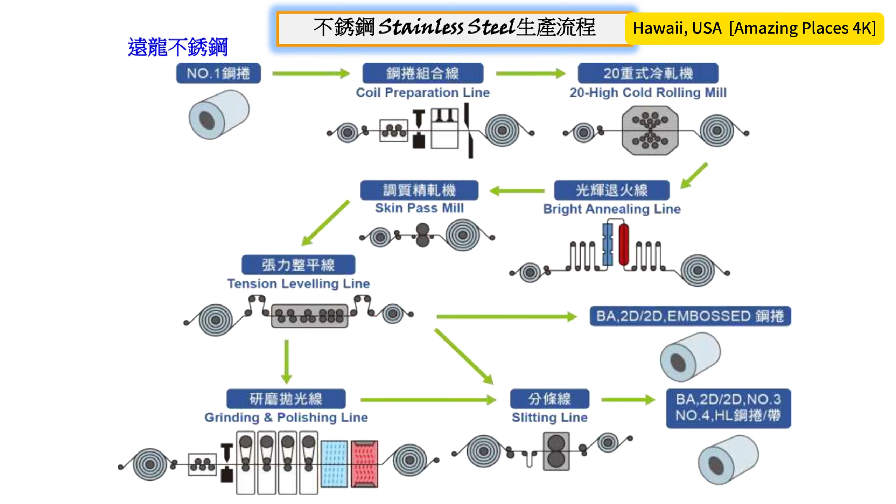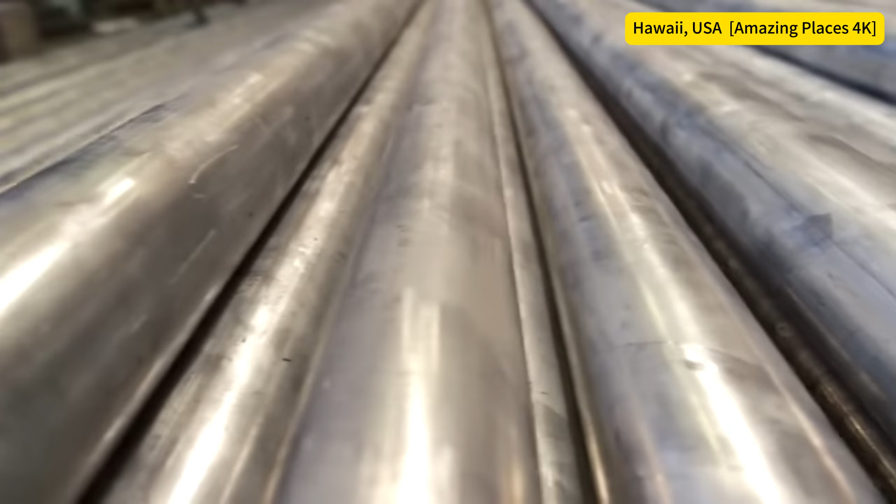How is stainless steel made? How are stainless bar and billet made? Stainless steel is one of the most versatile and widely used materials in the modern world, playing a crucial role in industries ranging from construction and automotive to medical devices and kitchenware. Its unique properties, including resistance to corrosion, high strength, and a sleek appearance, make it indispensable in countless applications. But how is this wonder material made?

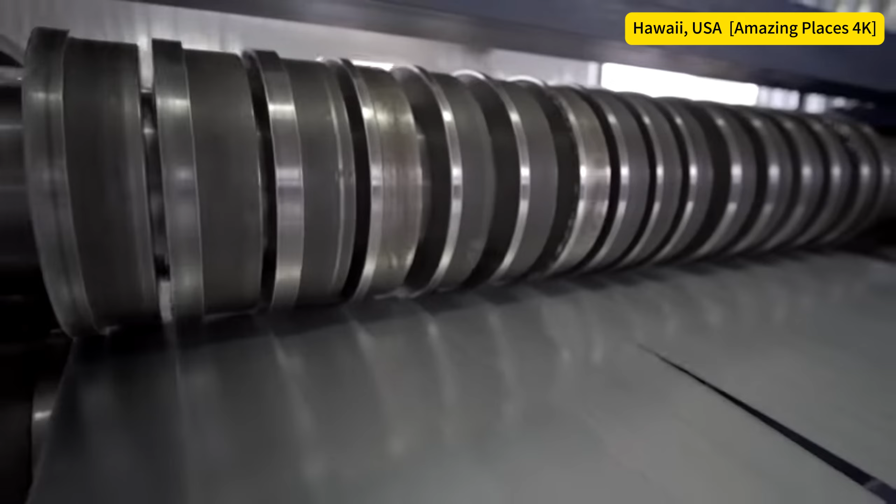The process of manufacturing stainless steel is a complex and fascinating journey that involves multiple stages, from the selection of raw materials to the final finishing touches. In this video, we'll take you through each step of the process, shedding light on the science and engineering that goes into creating this remarkable alloy.

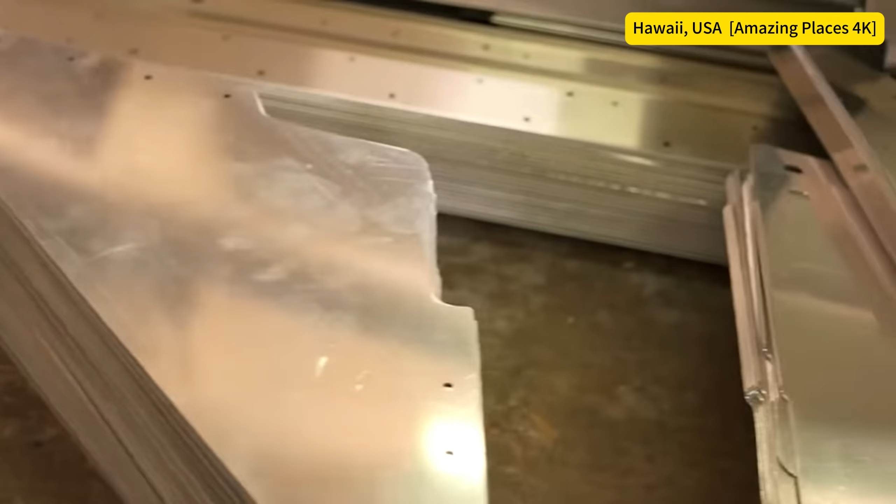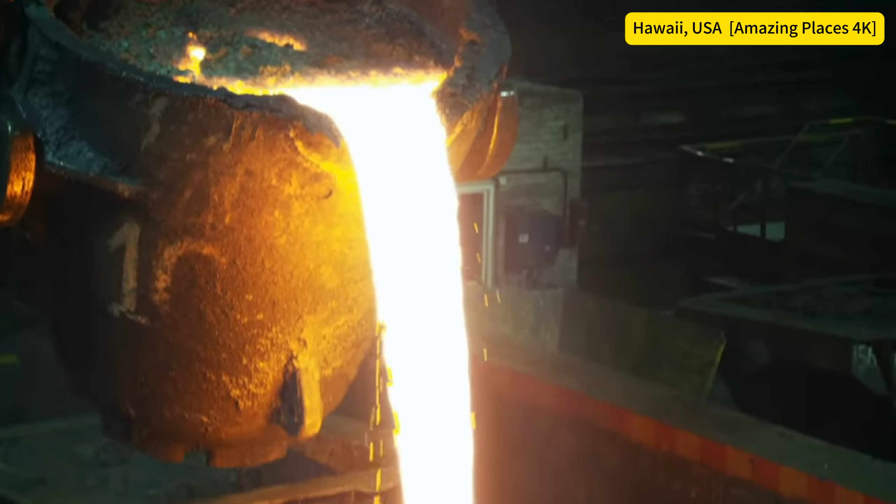The story of stainless steel begins with the selection of the right raw materials. The primary component of stainless steel is iron, which is extracted from iron ore found in the Earth's crust. Iron ore is rich in iron oxides and must be refined to extract pure iron. This is done in a blast furnace, where the iron ore is heated to extremely high temperatures, around 1,700 degrees Celsius, along with coke, a form of carbon, and limestone.

The intense heat causes the iron ore to melt, and the carbon from the coke reacts with the oxygen in the iron ore to form carbon dioxide, leaving behind molten iron. This molten iron, also known as pig iron, is the starting point for making stainless steel. However, stainless steel is much more than just iron.

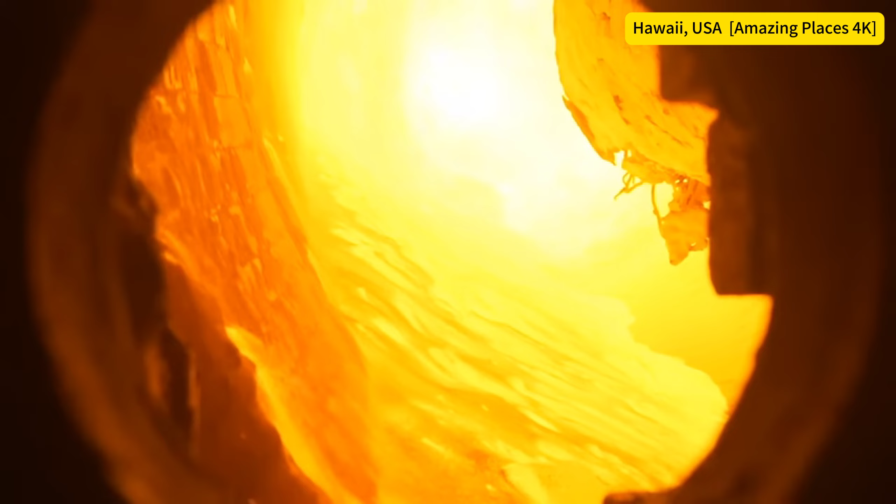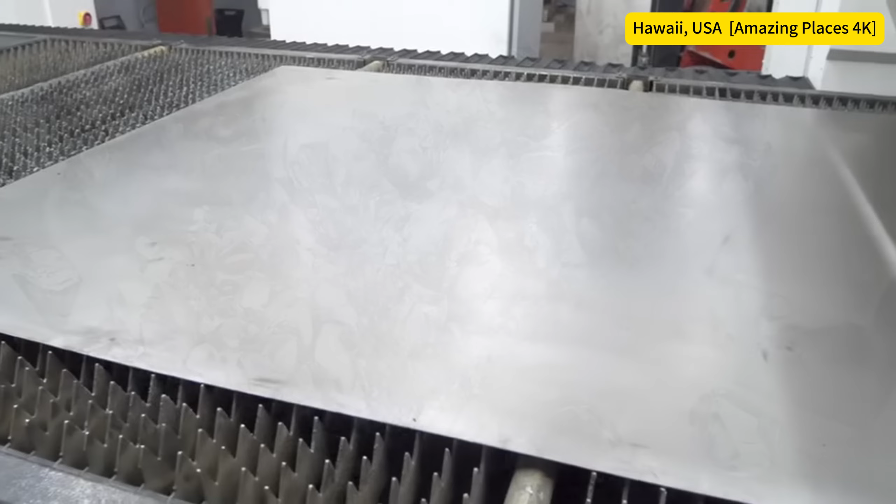Its defining characteristic is its resistance to rust and corrosion, which is achieved by adding specific alloying elements, most notably chromium. Chromium is essential because it reacts with oxygen to form a thin, invisible layer of chromium oxide on the surface of the steel. This oxide layer is what gives stainless steel its stainless property, as it prevents further oxidation and corrosion of the metal beneath.

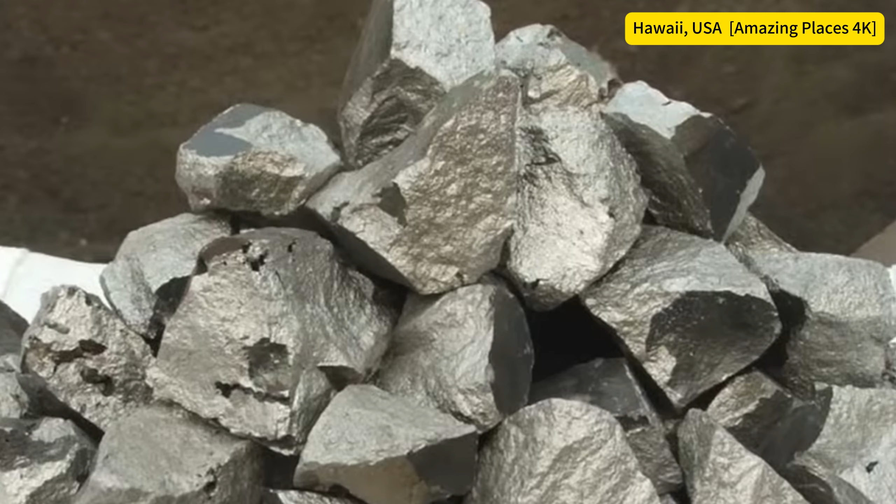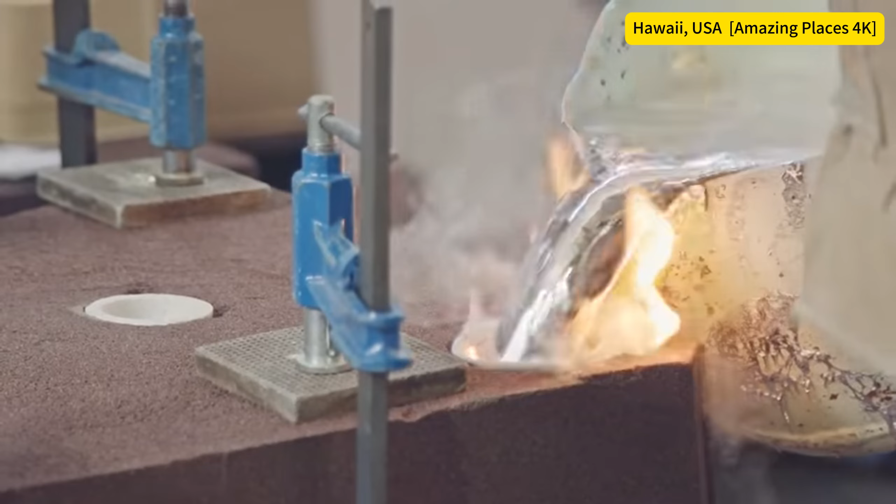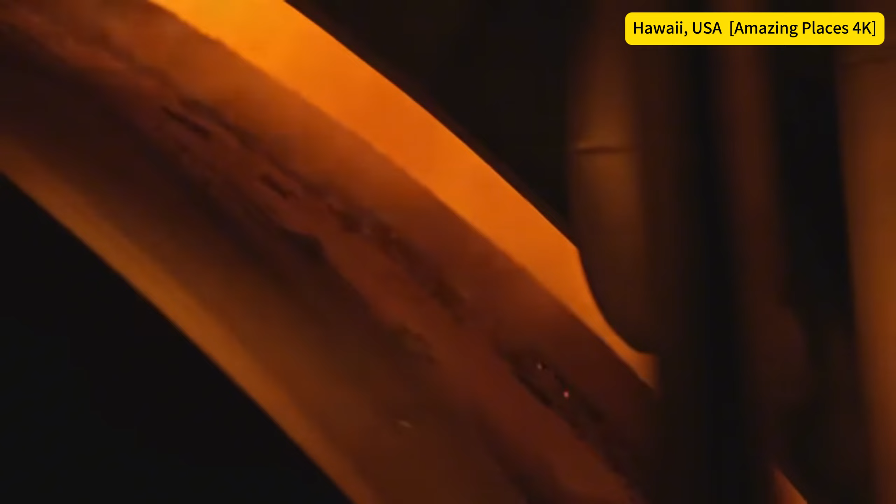To achieve this, chromium is added to the molten iron in the form of ferrochrome, an alloy of iron and chromium. Typically, stainless steel contains at least 10.5% chromium by weight, although the exact percentage can vary depending on the grade of stainless steel being produced. The addition of chromium is just the beginning. Depending on the desired properties of the final product, other elements such as nickel, molybdenum, and manganese may also be added to the molten steel.

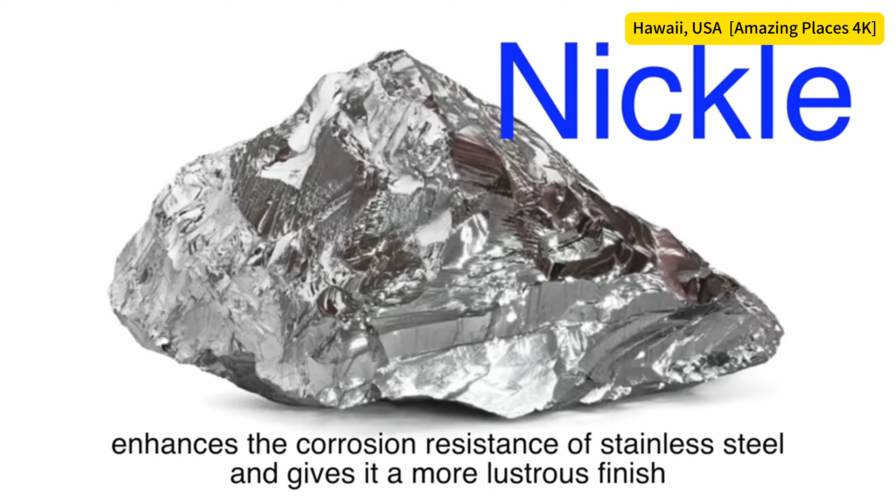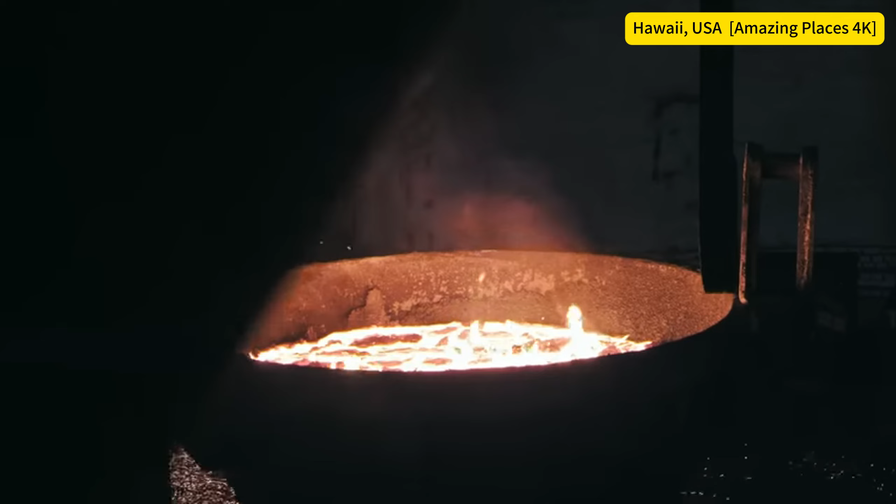Nickel, for example, enhances the corrosion resistance of stainless steel and gives it a more lustrous finish. Molybdenum increases the steel's resistance to pitting and crevice corrosion, which is especially important in environments with high chloride content, such as marine applications. Manganese improves the steel's strength and hardness. These alloying elements are carefully measured and added to the molten steel in precise quantities, as even small variations can significantly impact the properties of the final product.

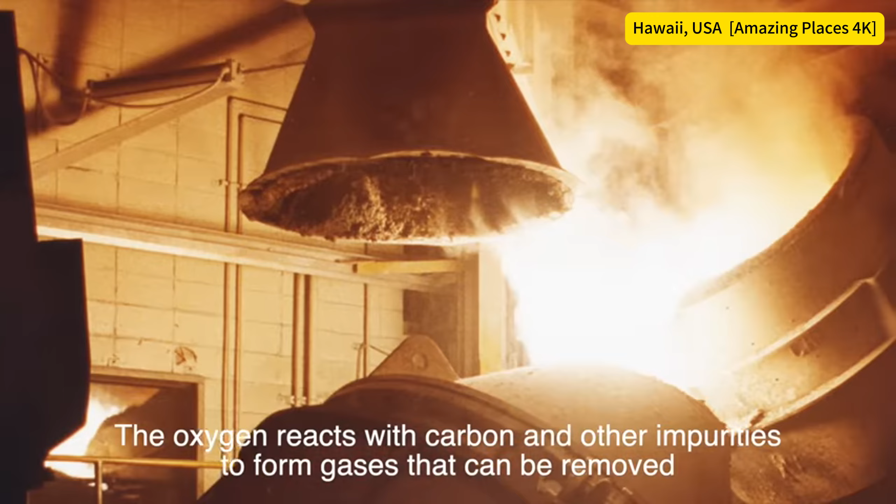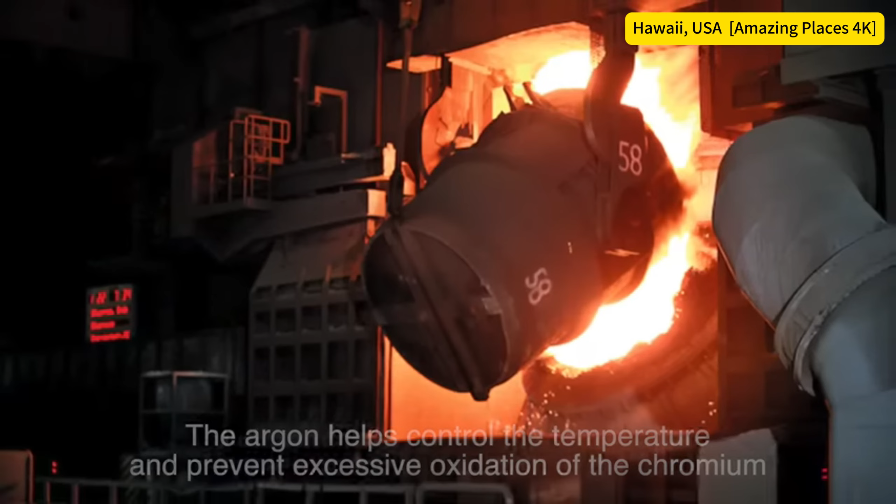Once the alloying elements have been added and thoroughly mixed with the molten iron, the next step is to remove any impurities that might have been introduced during the process. This is done through a process known as argon-oxygen decarburization, AOD. In AOD, a mixture of argon and oxygen is injected into the molten steel. The oxygen reacts with carbon and other impurities to form gases that can be removed, while the argon helps control the temperature and prevent excessive oxidation of the chromium. The result is a purer form of stainless steel, with a carefully controlled composition that ensures the desired properties are achieved.

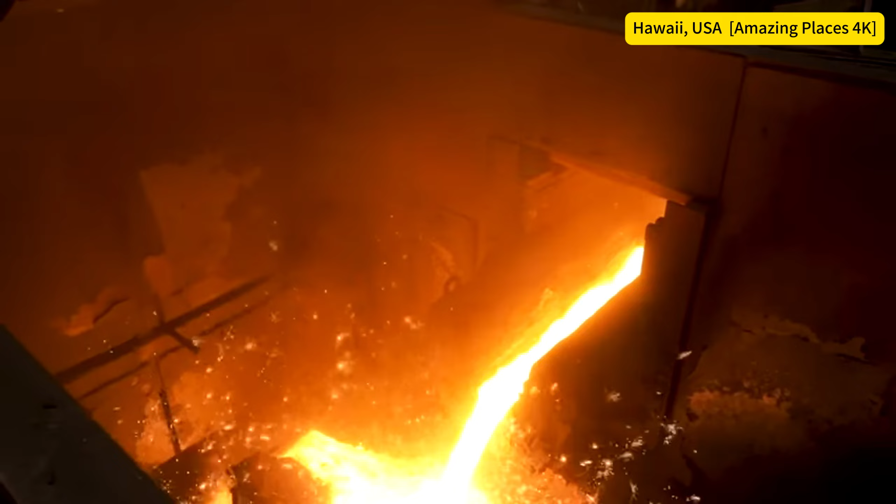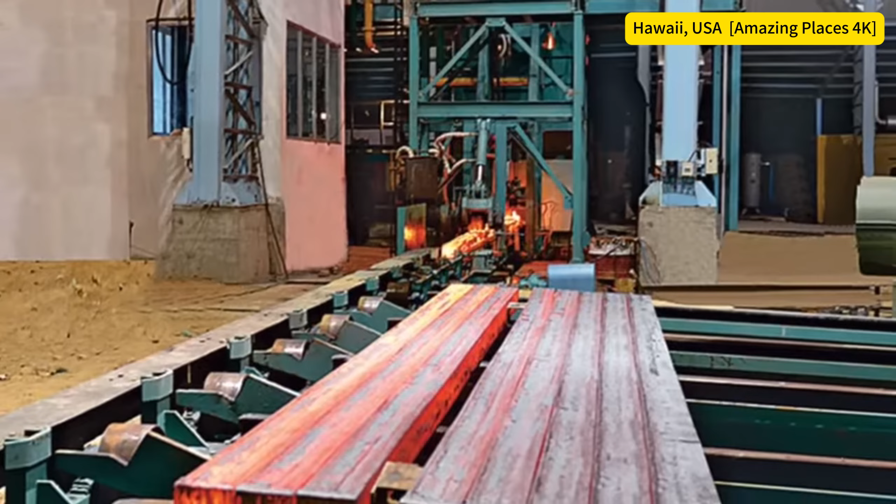After the AOD process, the molten stainless steel is ready to be cast into solid form. This is typically done using a method called continuous casting, where the molten steel is poured into a water-cooled mold. As the steel cools, it solidifies into a long continuous slab or billet, which can then be cut into smaller sections as needed. Continuous casting is preferred because it allows for the production of large quantities of stainless steel with consistent quality. The slabs or billets are then allowed to cool further before being sent to the next stage of the manufacturing process.

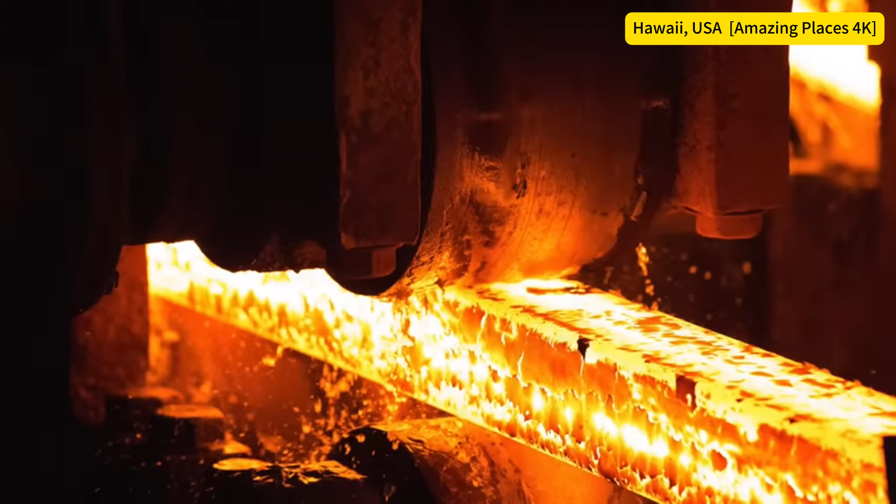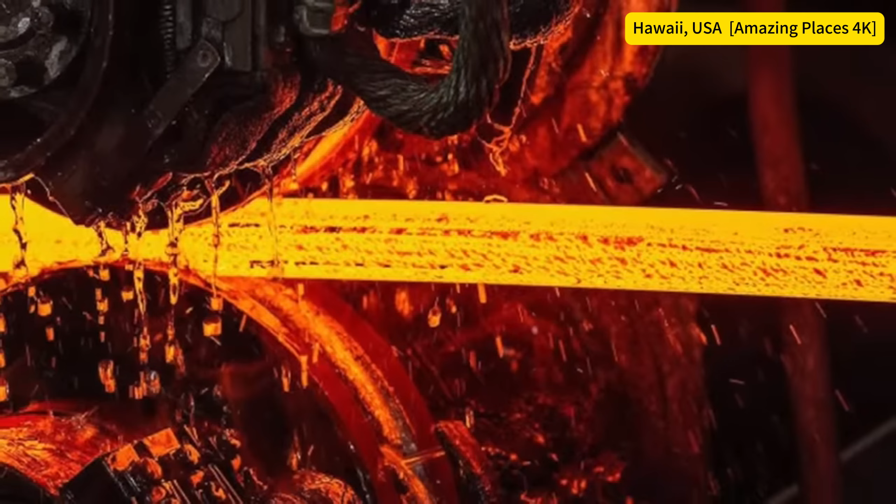The next step in the production of stainless steel is hot rolling. The cooled slabs or billets are reheated to a temperature of around 1,200 degrees Celsius and pass through a series of rollers. These rollers apply pressure to the steel, gradually reducing its thickness and shaping it into the desired form. Hot rolling not only shapes the steel, but also improves its mechanical properties by refining the grain structure. The steel can be rolled into various forms, such as sheets, plates, bars, or wires, depending on the intended application. After hot rolling, the steel is allowed to cool down again before moving on to further processing.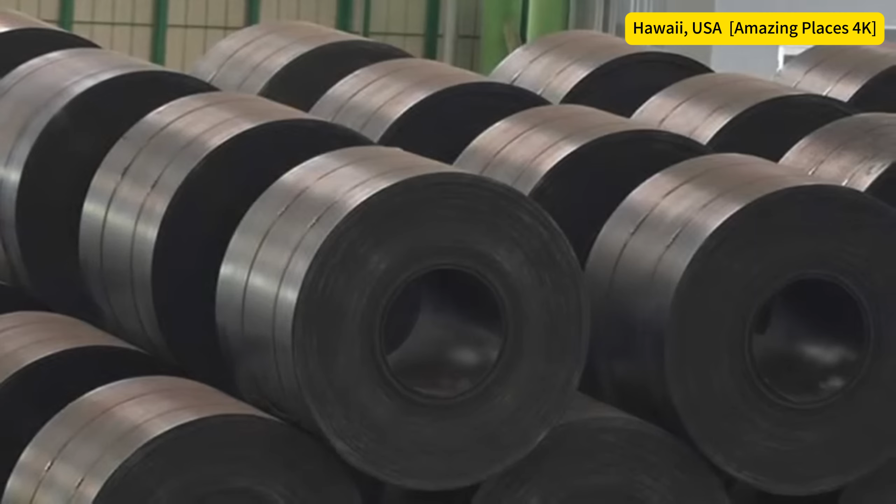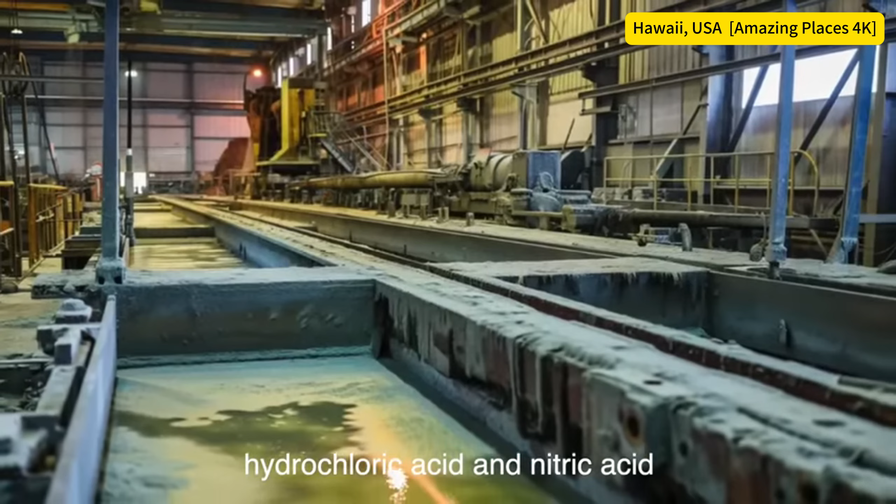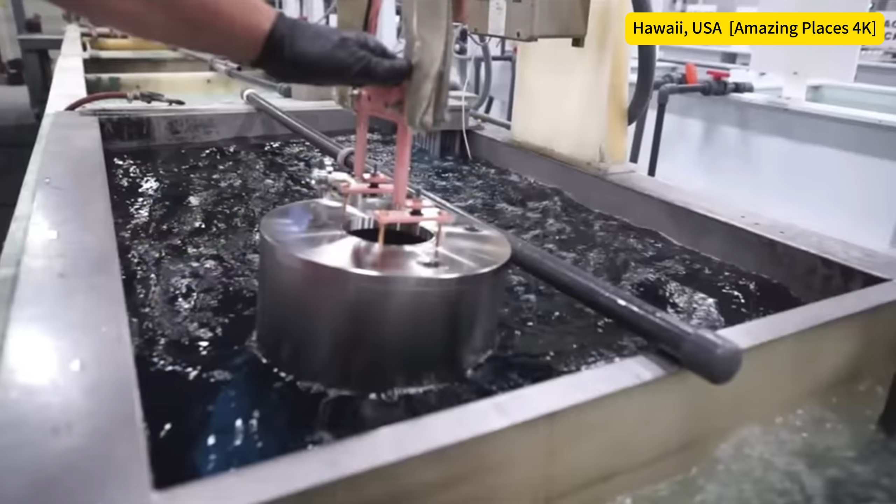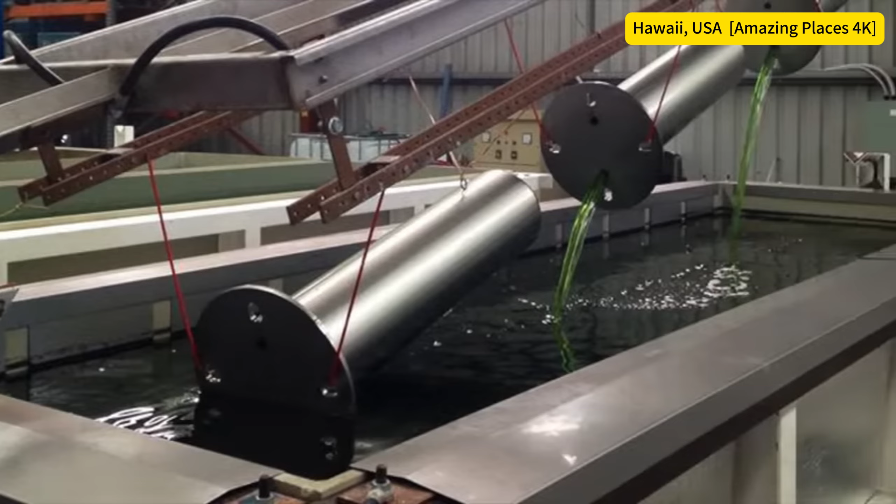At this point, the stainless steel still has a rough, oxidized surface that needs to be cleaned and finished. This is where the process of pickling comes in. Pickling involves immersing the steel in an acid bath, usually a mixture of hydrochloric acid and nitric acid. The acid removes the oxide scale and any other surface impurities, leaving behind a clean, smooth surface. In some cases, additional treatments such as electropolishing may be used to achieve an even higher level of surface finish, particularly for applications where aesthetics are important, such as in kitchenware or architectural components.

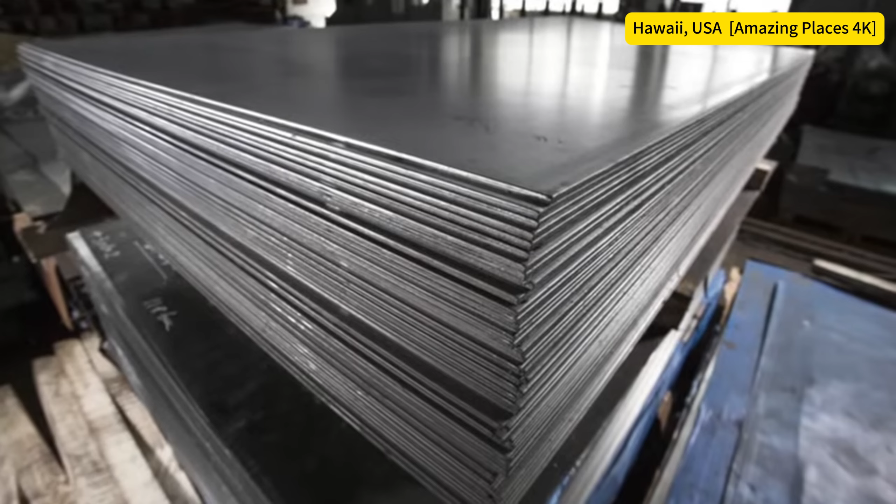Once the stainless steel has been pickled and cleaned, it is ready for the final finishing processes. These processes vary depending on the intended use of the steel and can include cold rolling, annealing, and surface finishing. Cold rolling involves passing the steel through rollers at room temperature to achieve a precise thickness and improve its surface finish.

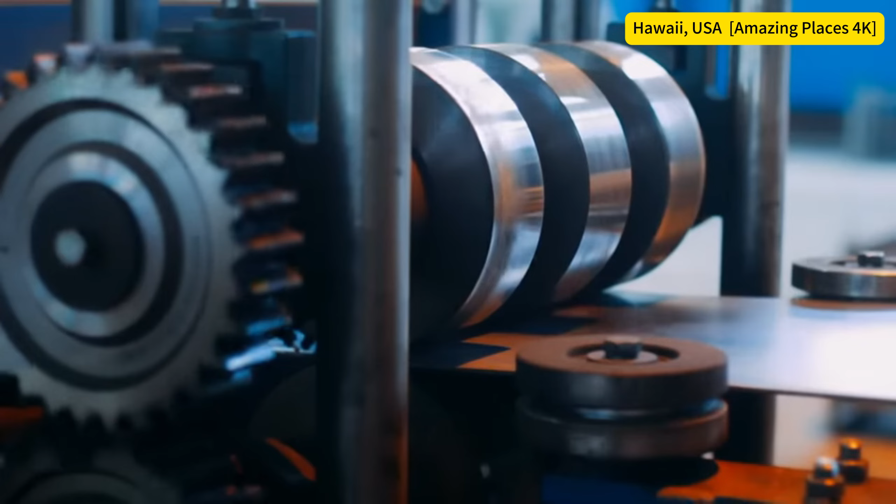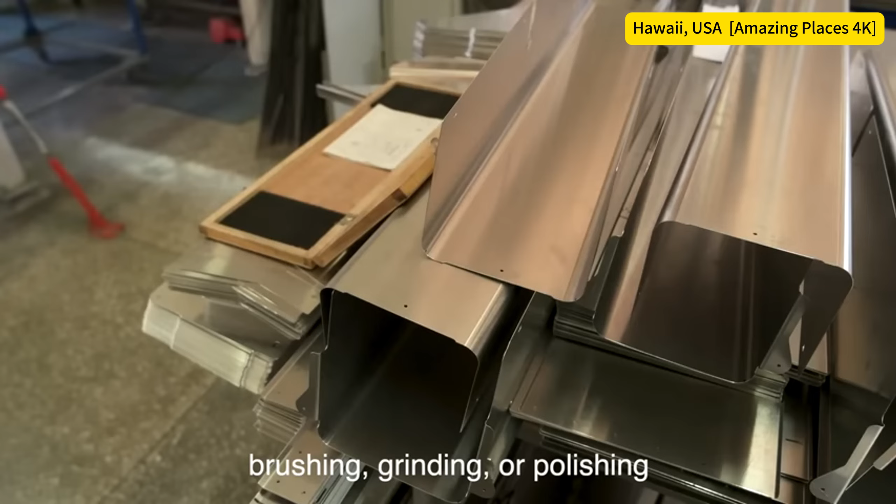Annealing is a heat treatment process that relieves internal stresses in the steel, making it easier to work with and enhancing its ductility. Surface finishing can involve a variety of techniques, such as brushing, grinding, or polishing, to achieve the desired texture and appearance. The final product may have a mirror-like shine, a matte finish, or a textured surface, depending on the customer's specifications.

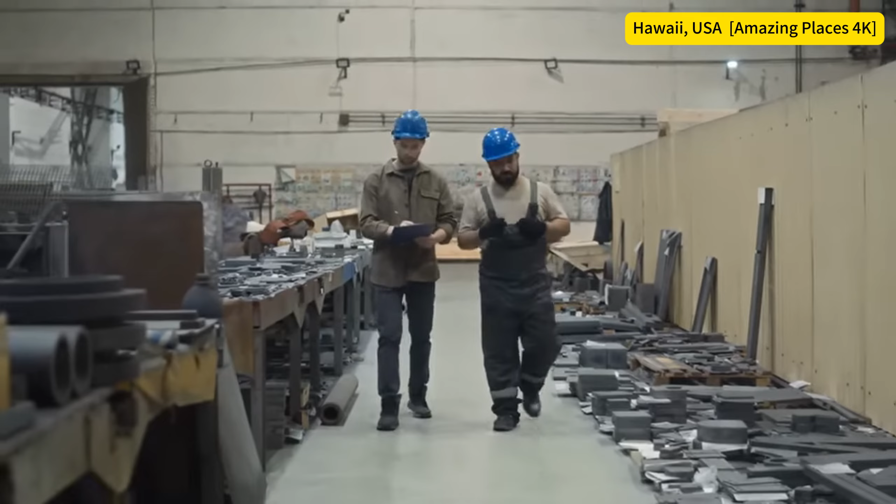The production of stainless steel doesn't end with the final finishing. Quality control is a critical aspect of the manufacturing process, ensuring that the steel meets the required standards for strength, corrosion resistance, and other properties.

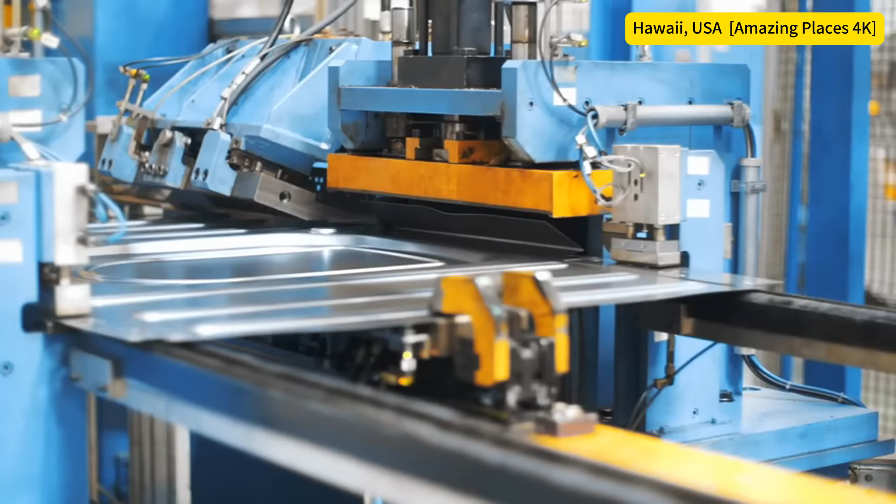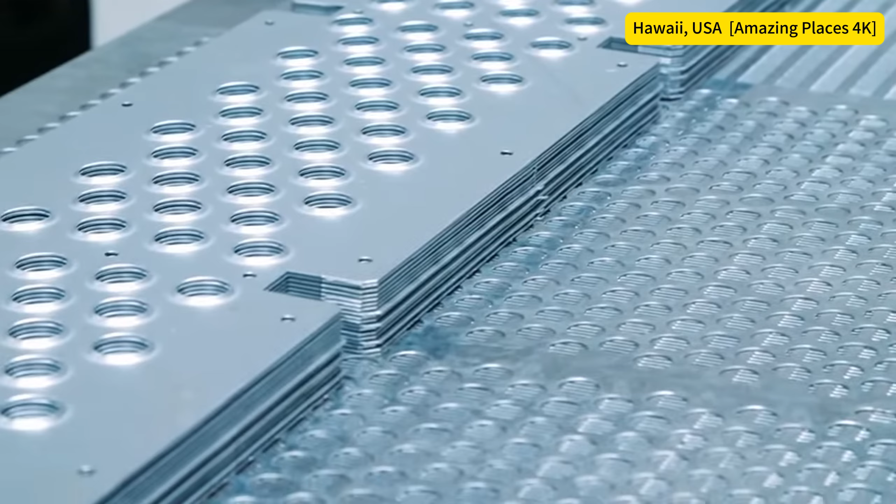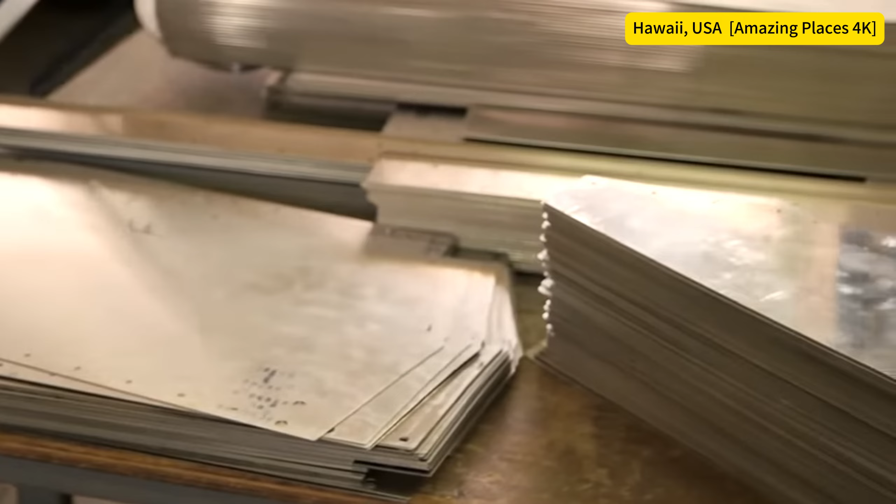Samples of the steel are taken at various stages of production and subjected to rigorous testing, including chemical analysis, mechanical testing, and microstructural examination. These tests verify that the composition and properties of the steel are within the specified limits, and that there are no defects that could compromise its performance. Only after passing these tests is the stainless steel considered ready for use.

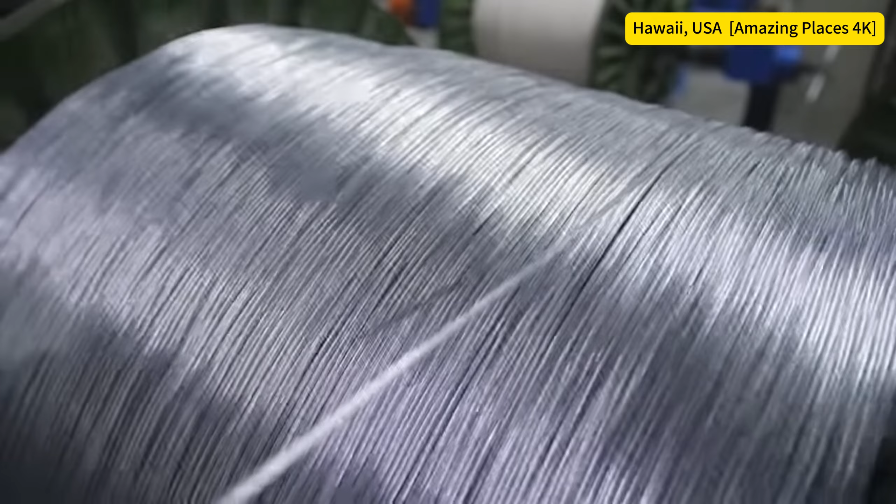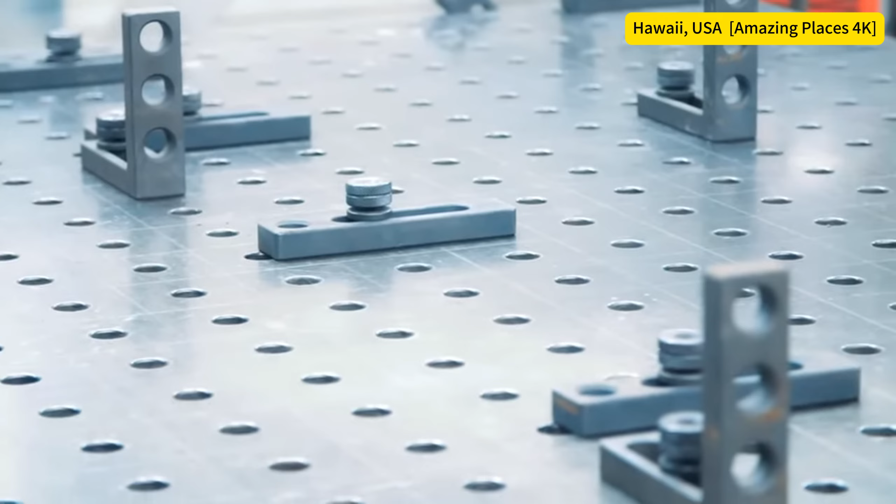Stainless steel is then ready to be shipped to manufacturers who will transform it into the products we use every day. It could become part of a kitchen appliance, a piece of medical equipment, a structural component in a building, or even a piece of jewelry. The versatility of stainless steel is one of its greatest strengths, and its journey from raw materials to finished product is a testament to the ingenuity and precision of modern metallurgy.

The production of stainless steel is a complex and highly controlled process that requires expertise in both materials science and engineering. From the selection of raw materials to the final finishing touches, each step is carefully designed to ensure that the steel possesses the properties needed for its intended use.

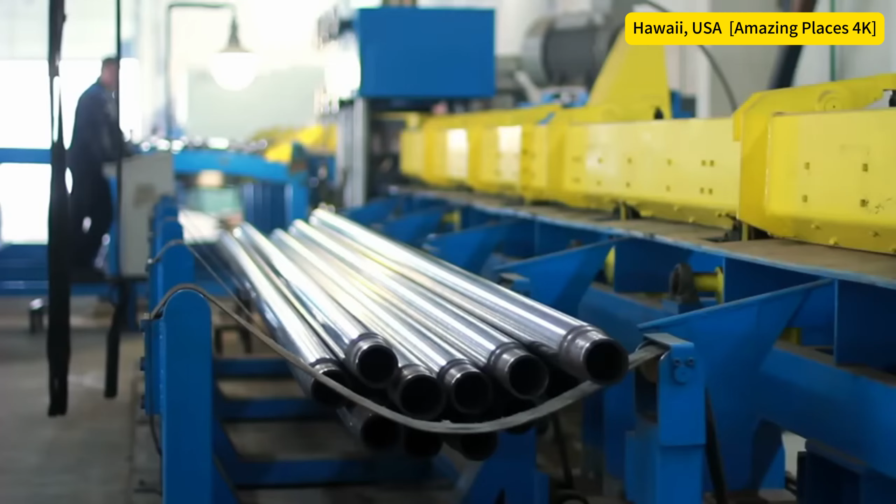Whether it's the chromium that provides corrosion resistance, the nickel that enhances durability, or the precision rolling that achieves the perfect thickness, every aspect of the process contributes to the creation of a material that is both strong and beautiful. So the next time you see a shiny piece of stainless steel, take a moment to appreciate the intricate and fascinating journey it has taken to reach you.

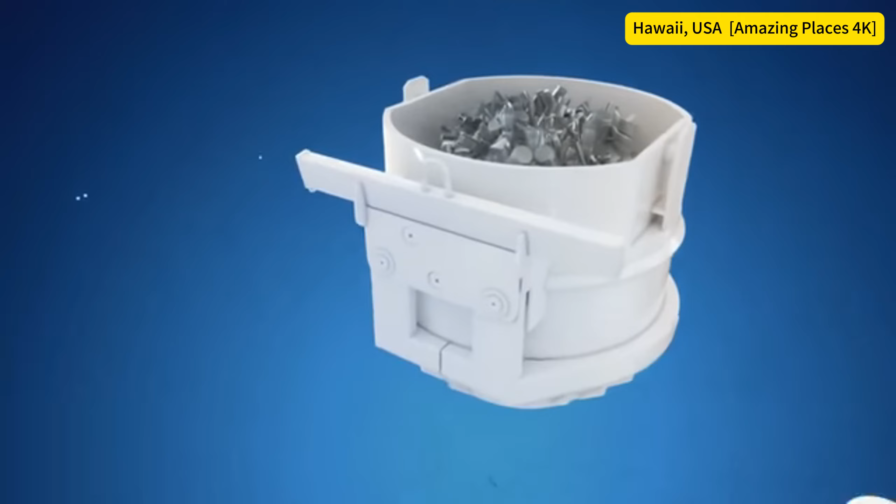At Sandvik, manufacturing is based on recycled steel and alloy materials. We buy recycled steel only from certified suppliers. The raw materials are analyzed and controlled, and any harmful ingredients are removed. The recycled steel is melted at 1600 degrees centigrade in an electric arc furnace. In the argon-oxygen decarburization vessel, carbon content is reduced to stainless steel levels.

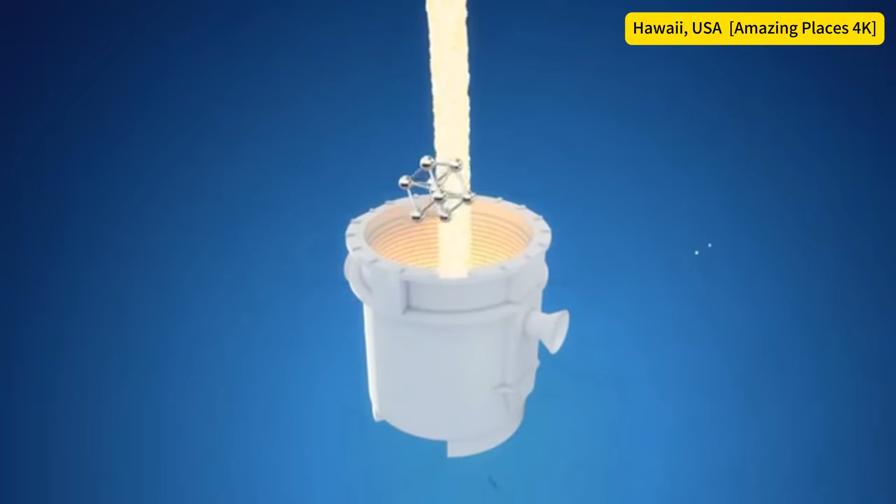Exhaust gases from the furnaces and AOD processes are filtered to cut pollution, and the dust thus extracted is further processed for metal recovery. The melt is transferred to a ladle furnace for fine-tuning of temperature and chemical composition. The chemical composition of the melt is closely monitored throughout the process, and we make continuous analyses to guarantee the correct steel grade and ensure traceability and consistency between the batches. The results are entered in a certificate that accompanies each batch through every stage of the process.

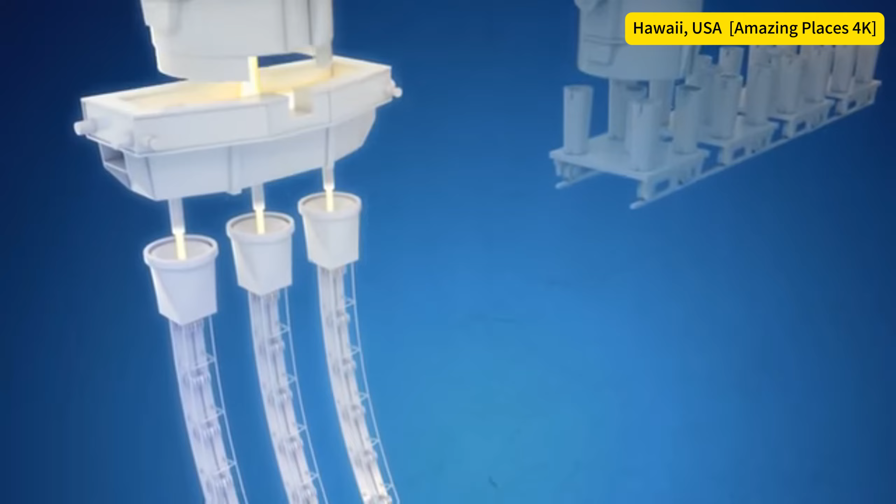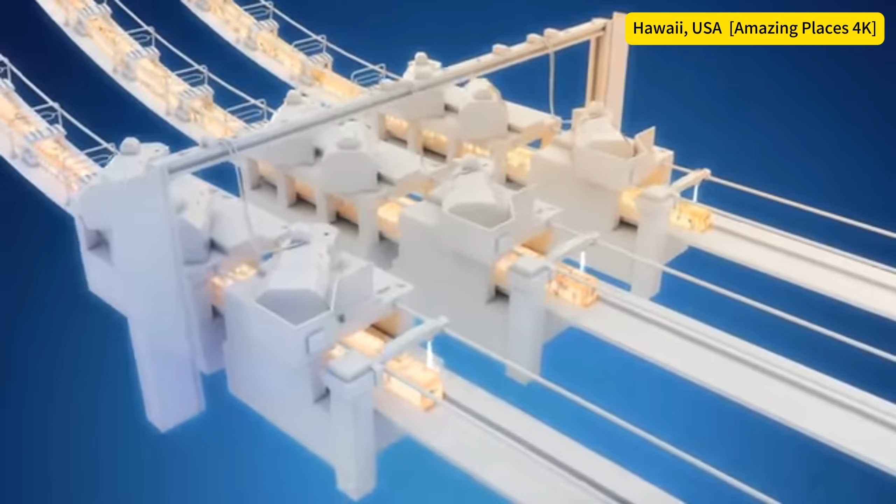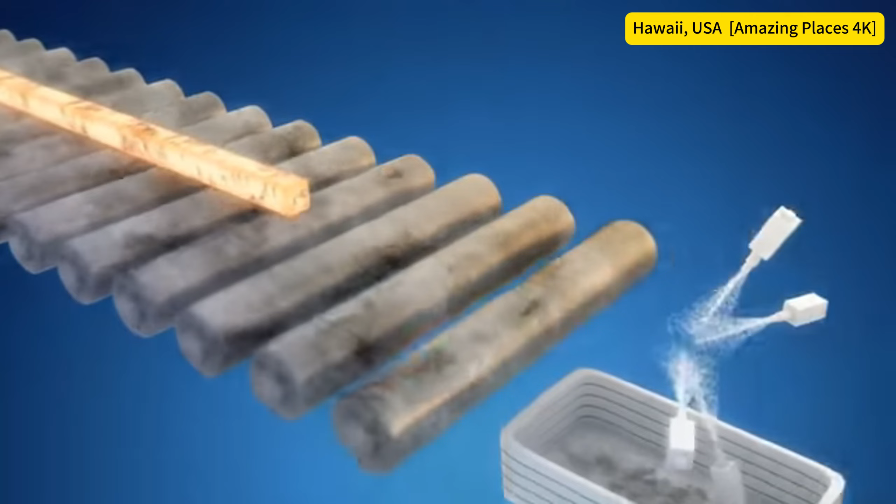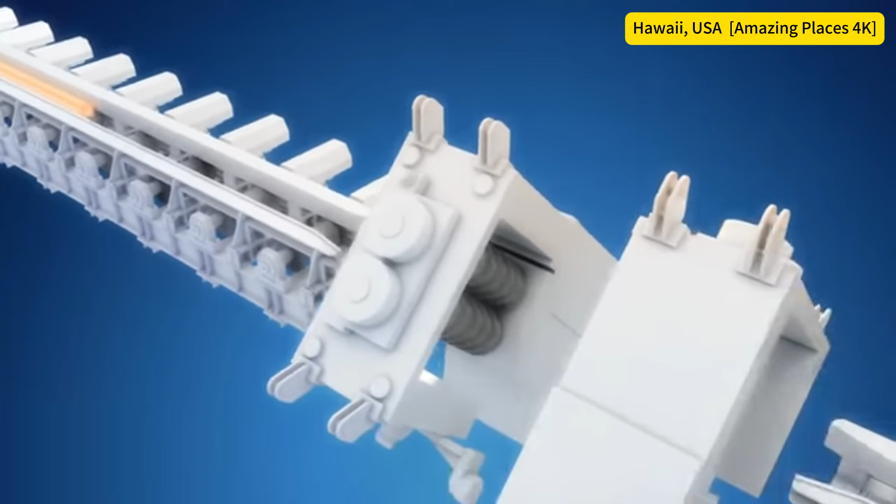The continuous cast material or ingots are pre-rolled in a blooming mill and then transported to a heating furnace to be reheated to the correct rolling temperature. The blooming mill is integrated with Sandvik's modern rolling mill to form one continuous production line. The new mill provides quick product dimension changeover, short lead times, energy savings, and excellent product quality.

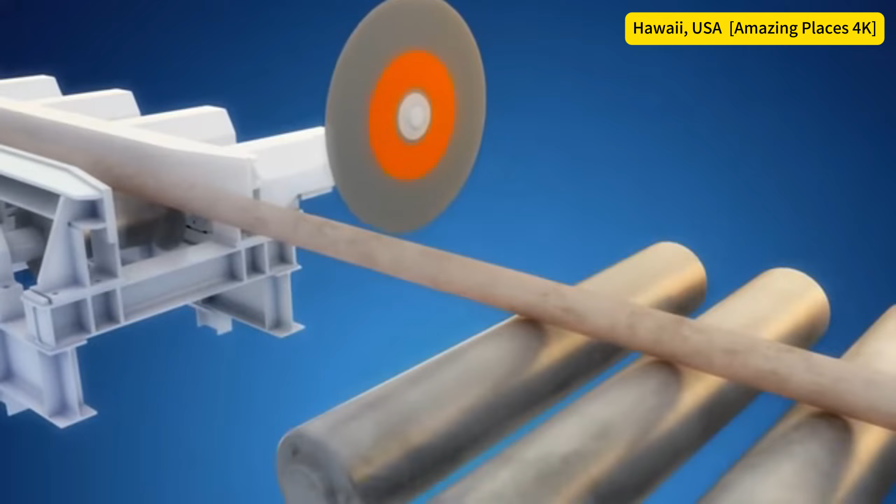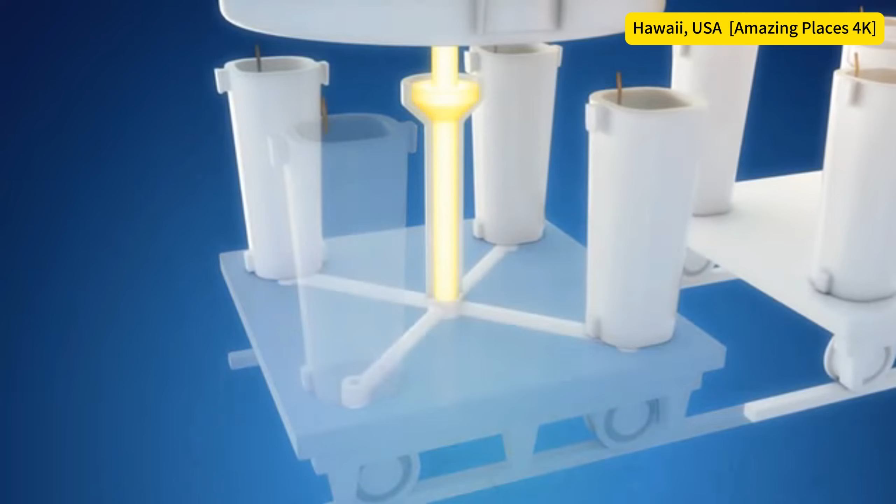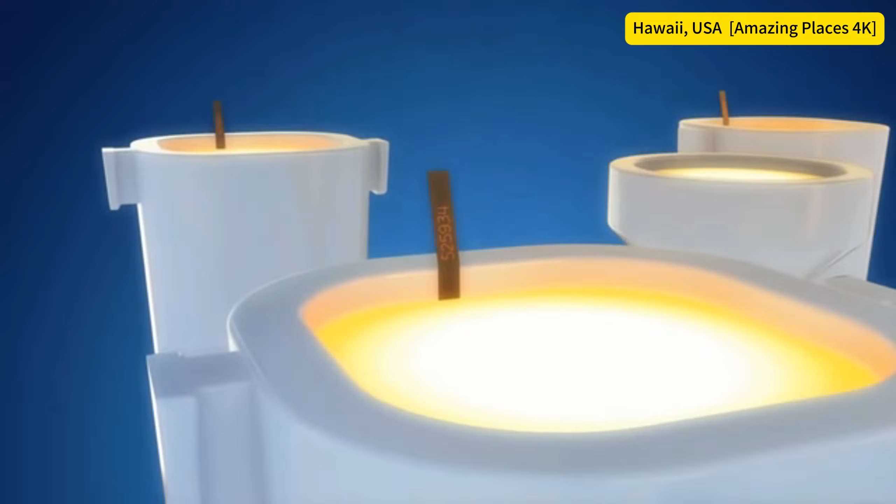Here, round and square billets and bars are rolled to a wide variety of sizes in many passes, and cut into requested lengths. To produce bars in heavier dimensions, the steel is cast into ingot molds by bottom pouring. Each ingot is marked with a heat number to ensure full traceability. The ingots are stripped from their molds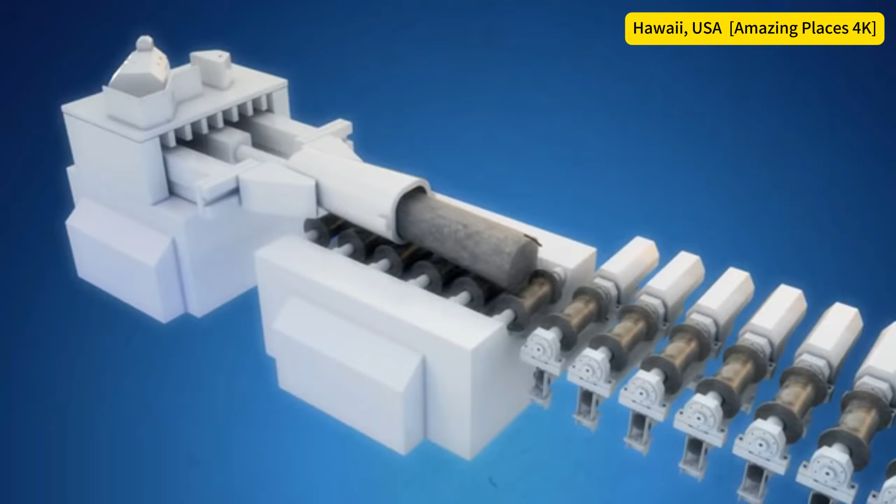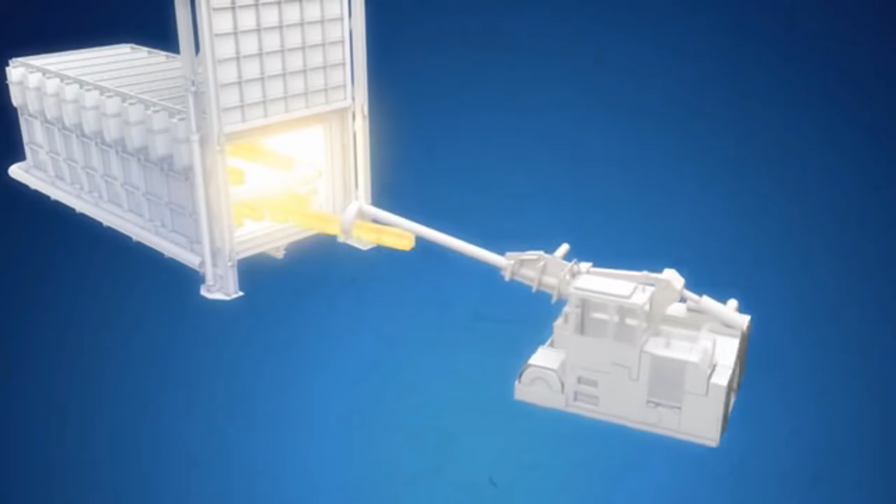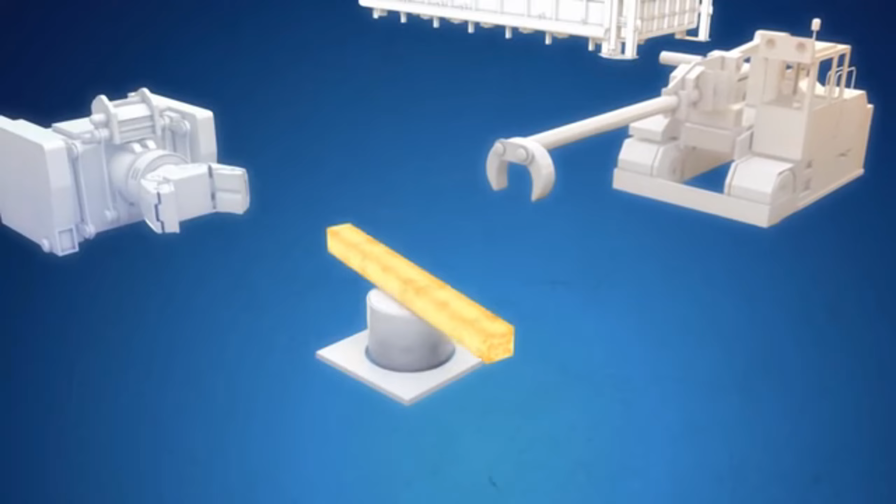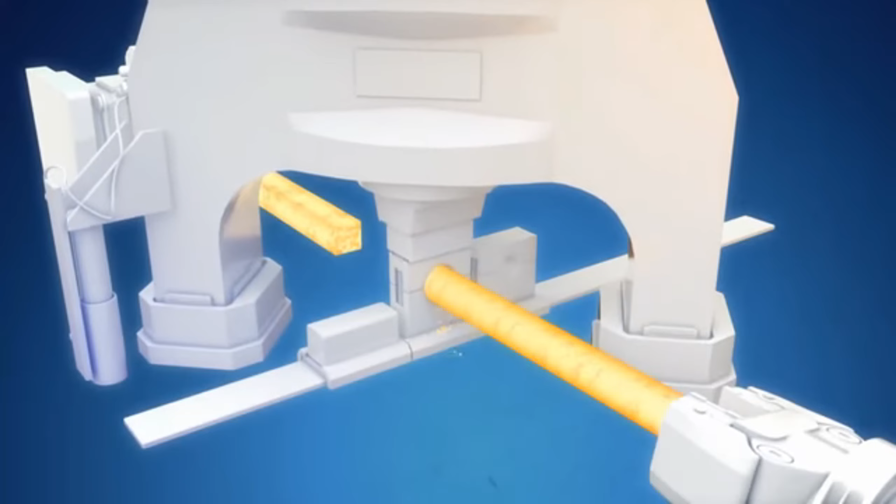heated and transported to hot working in an ingot rolling mill. The pre-rolled ingots are then heated to 1260 degrees centigrade to optimize further processing, after which they're transported to the computerized forging press. The hydraulic forging press, with its 1800-ton press force, is used to produce bars in sizes up to 450 millimeters.

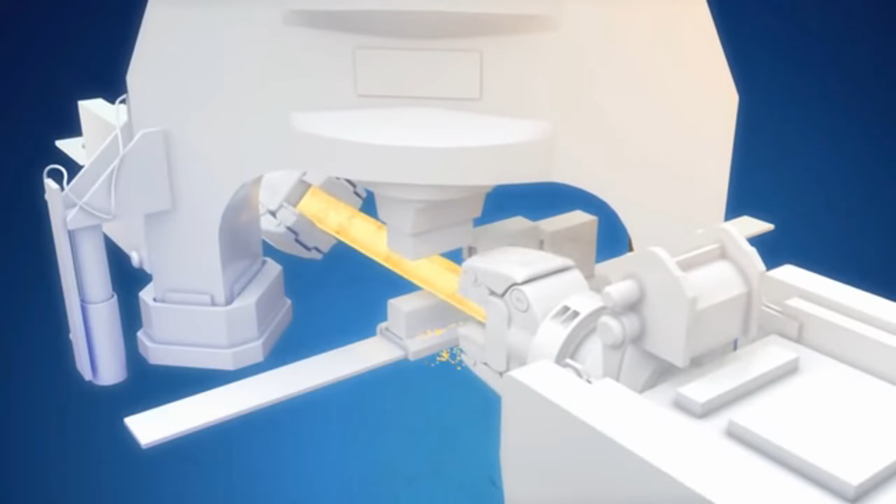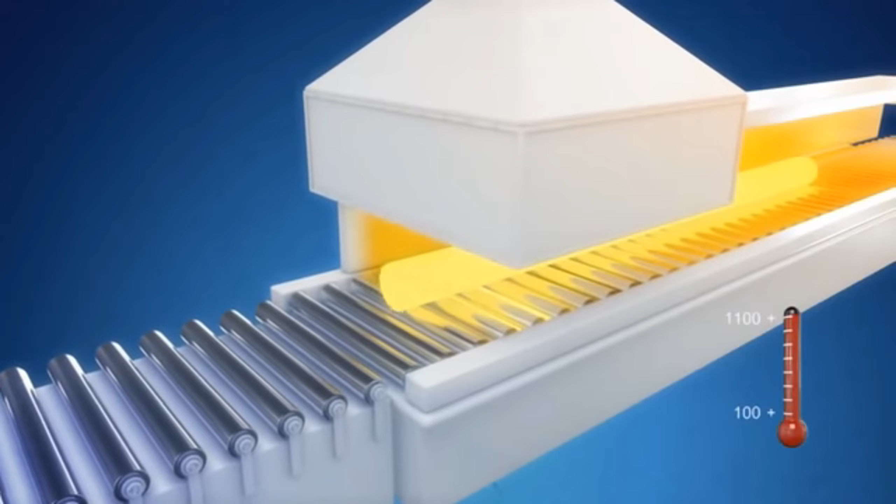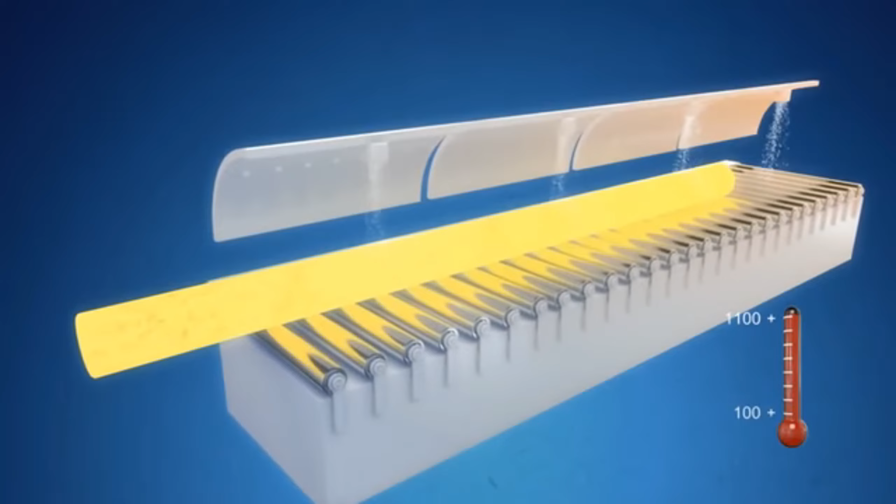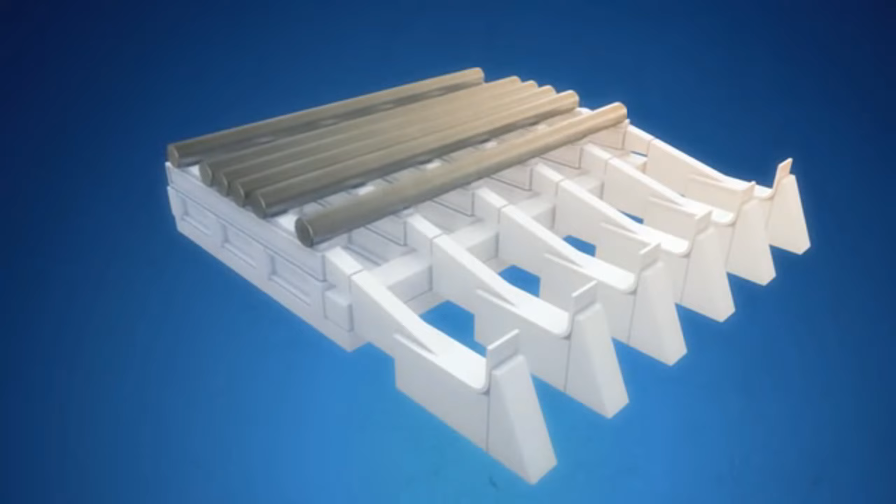The bar, now round, is reheated to 1100 degrees centigrade in a quench annealing furnace, followed by rapid cooling in water to ensure the material structure is in accordance with official international and customers' specifications. The bars are transported to the cooling bed, before being peel-turned and polished to mirror finish.

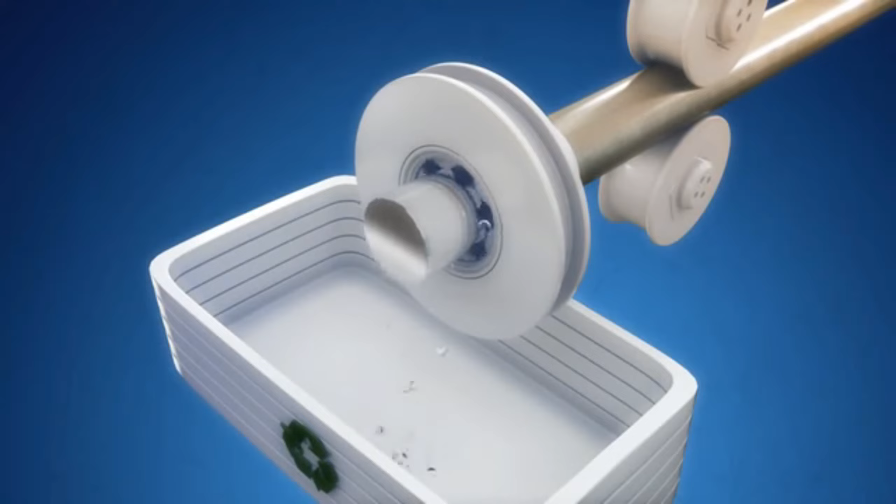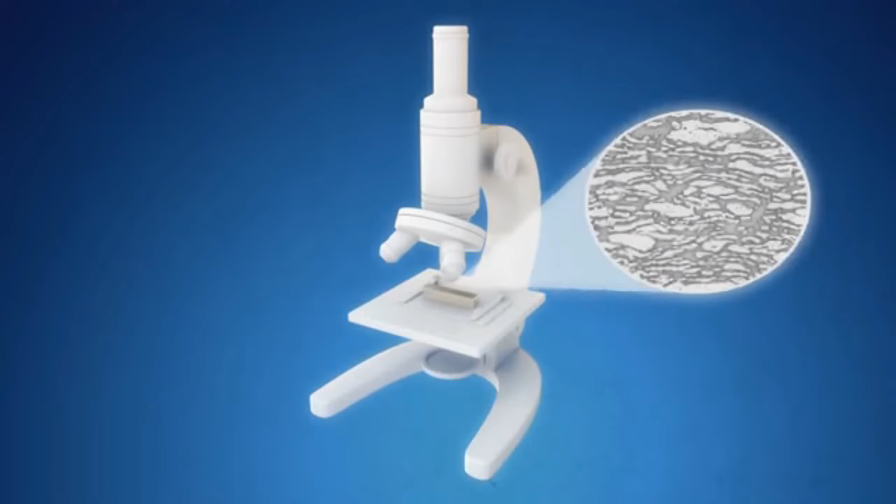The finished bar is ink-marked and visually inspected. The destructive testing stage includes tensile strength tests, impact tests, as well as confirmation of corrosion and microstructure properties. The bars are delivered together with the required material certification.